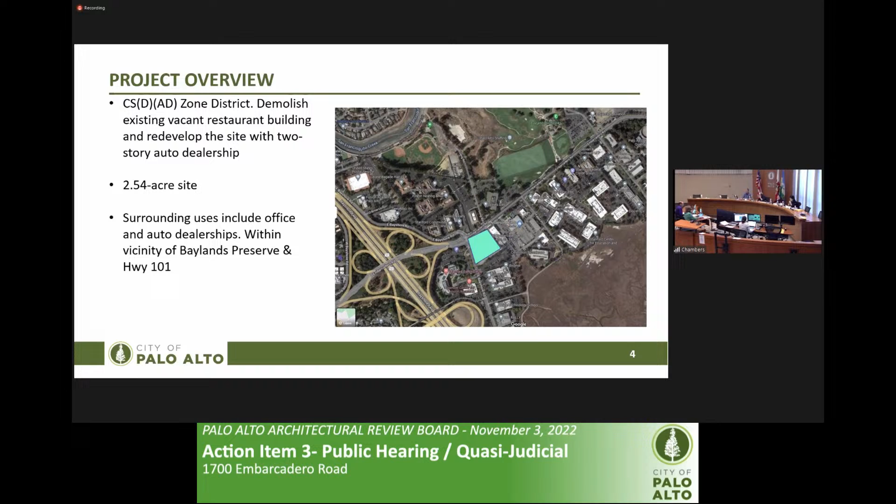This project is completely zoned for an automobile dealership. It does include the CSD, which is site and design - that's why we're going through this process - as well as the architectural, and the automobile dealership combined district, which provides for some unique development standards afforded to dealership applications. The project proposes to demolish the existing vacant restaurant building and redevelop the site with a two-story dealership. The site itself is 2.5 acres. Surrounding uses include offices and automobile dealerships, and it is within the Baylands Preserve area, but within the private development area, and is also near Highway 101.

The requests for the project include the site and design, a variance which is a newer application and request because of parking lot shading, a design enhancement exception for the build-to setbacks, and consideration of a waiver of a loading space on the site. The dealership itself is proposing to be around 31,000 square feet, which equates to 0.29 FAR - well below what is otherwise allowed on the site.

Just to orient you a little bit on that site plan, the drive area between the showroom building and the service building is not counted per the code for floor area. So we're really counting the showroom space, the service space, and the trash enclosure for the floor area ratio.

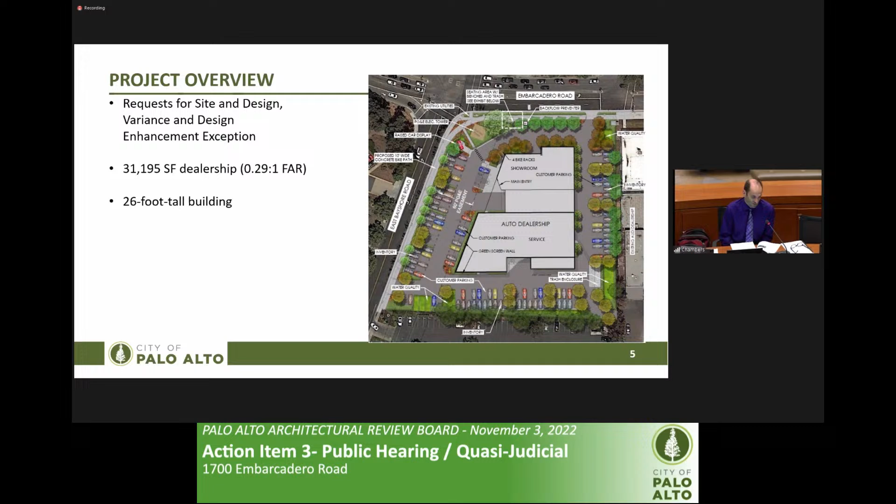The building itself is a little different than the prior iterations on the site, in part because this project includes its inventory on the surface parking lots. The other iterations included the inventory on the interior of the building, through a parking structure or an automatic vehicle storage system, which greatly increased the mass of the project. So this building is vastly smaller than the other iterations we've seen.

Because that inventory is now on the parking lot, there is more parking lot area, making it a little more difficult for them to meet the parking lot shading requirements. We received some good feedback early on in the preliminary ARB, as well as formal hearing comments, regarding the multi-use pathway, and also eliminating a row of parking to allow for that bicycle path.

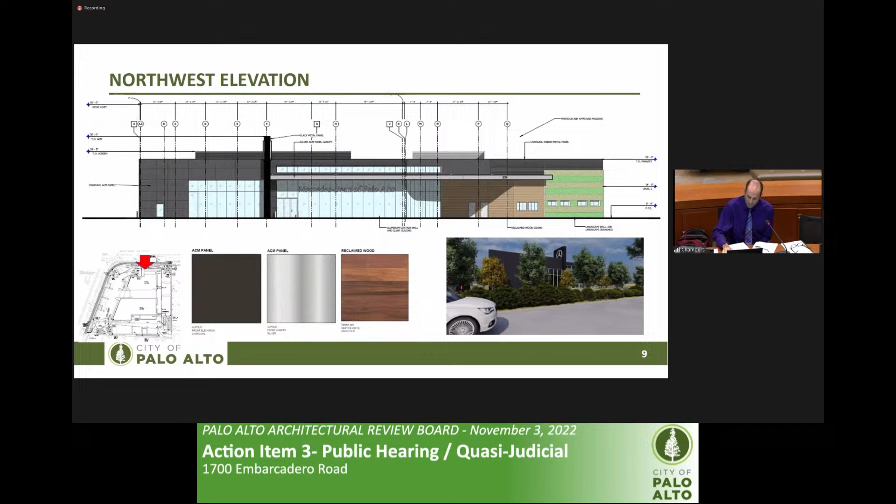But along some of the other elevations, such as the Audi side, they've introduced more green colors in the stucco. Last meeting there was a door there for the service; now that's completely open. You can see the door into the actual service building, and the car wash as well.

Southeast elevation faces the office side. Again, you can see it's more of that green color—the applicant described that when they were out there in the Baylands, that green was the color that was more prevalent, rather than a beige type of color. You can also see the metal paneling was pulled back; in the June meeting you can see at the top where that's been pulled back, showing the difference between the more green hues and the gray hues.

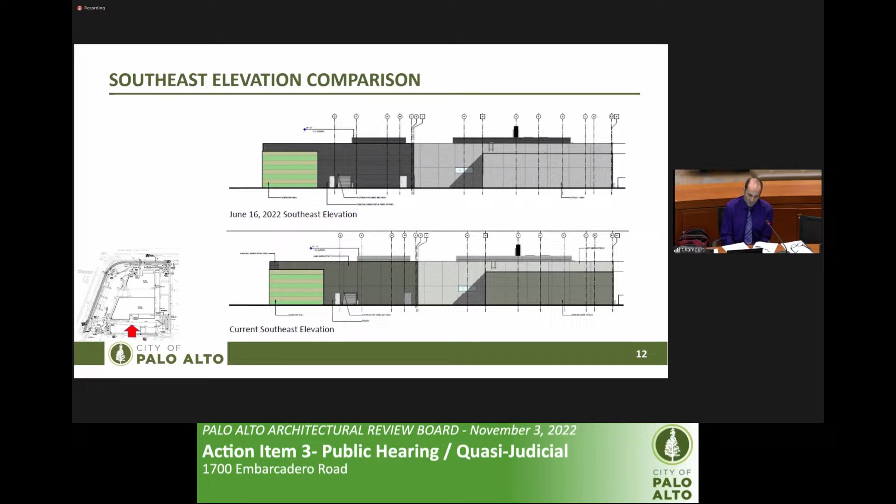Some of the key issues identified on the site are compliance with the Baylands master plan, the bicycle pathway, parking lot shading, build-to setbacks, and required loading spaces. Regarding the Baylands master plan, there's a site assessment and design guidelines that address development in the area, though this is in the private area, so it's a much smaller and slimmer set of guidelines than for developing in the Baylands proper. Nonetheless, one we want to highlight is that the project promotes low and horizontal elements—far and away, this project is low compared to any of the other projects we've seen on this site.

The project uses muted and compatible colors with appropriate materials. As I mentioned, the dealerships do have some more metallic colors to them, and I think ARB in the past has been supportive of that. The lighting would be addressed through conditions of approval to ensure there's no spillover into the Baylands for the wildlife.

So the bicycle path, there's no bicycle lane along that frontage. It just stops at the property line, I think in part because of the extra turn lane, the left turn lane. There's just not space in that roadway to afford that. There are mature trees under those power lines now, those are PG&E power lines.

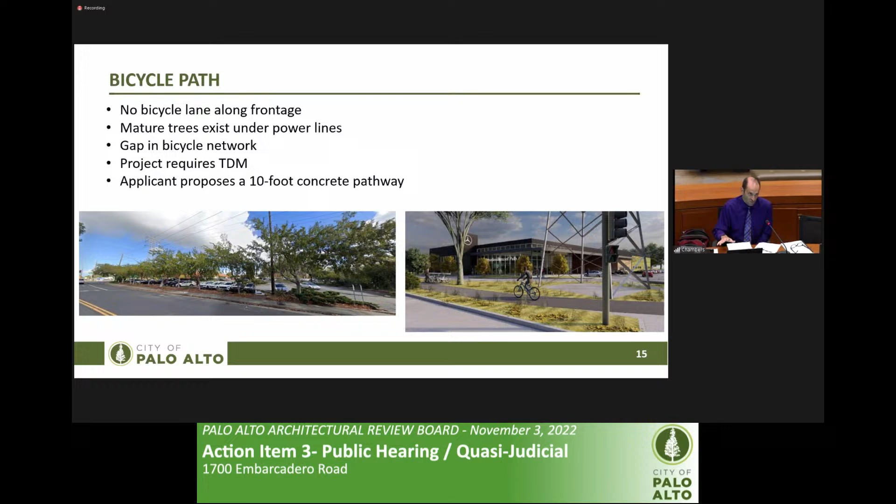The other issue is the parking lot shading. The code requirement is 50%. The project has upped the shading from kind of the upper 30s to the low 40s here, 41%. We do want to highlight there, we provide that imagery on the left.

26% of the property is encumbered by easements—various easements from PG&E, our own utilities, underground and above ground. They have various restrictions on what they can do there regarding planting, height of things, and structures can't be located there. The other issue is the shape of this lot is trapezoidal. It does come to a narrow point towards the intersection, which makes that building very awkward, especially for an automobile dealership trying to get circulation around the site.

The project does also plant trees offsite in the Baylands, and those are natives. So that's a plus that will help us out. But if you were to take out the easement area itself, the remaining parts of the project would meet that 50%.

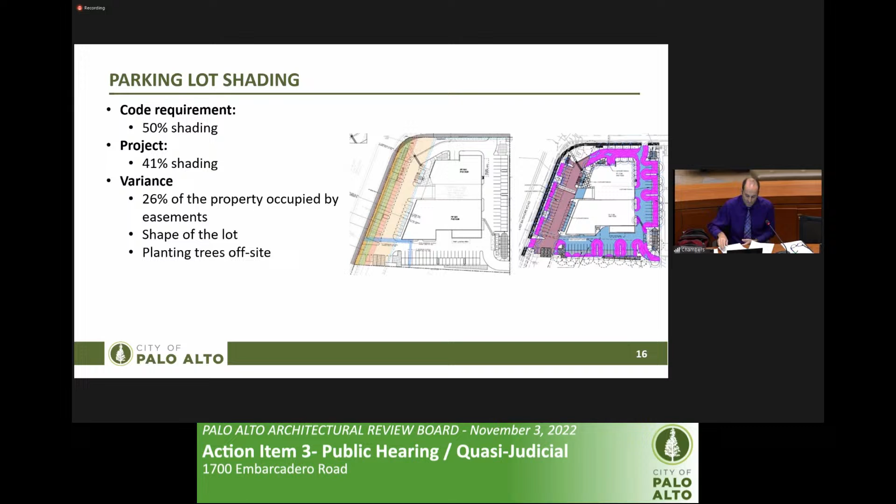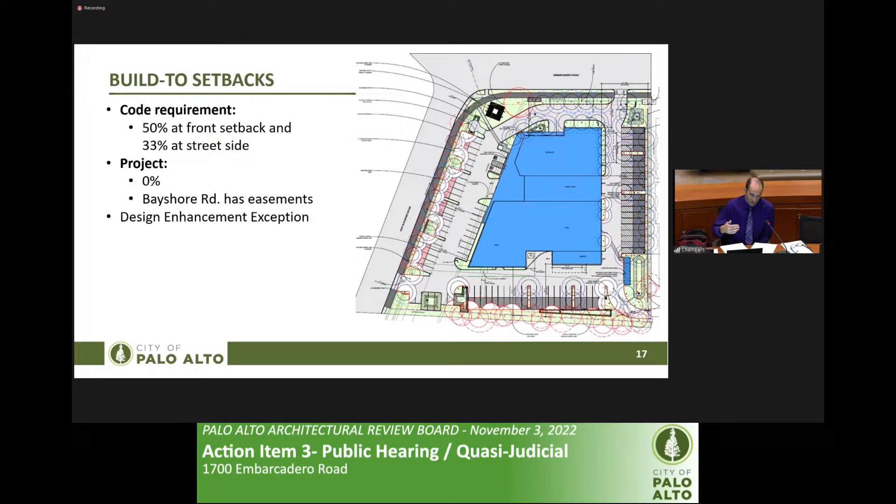The other issue is the build-to setbacks, and we mentioned this many times before. I don't want to spend a whole lot of time on this necessarily because there's just no way the building will be able to be in that easement area. And it doesn't make sense to have the building close along Embarcadero Road because we want to have that circulation around the building.

There are 2 loading spaces required for the project. They've identified spaces for those, and the actual dimensions of those spaces are spot on, they're good. However, the red space there adjacent to the car wash, if that was used, it would not provide sufficient driveway access space to go around. So somebody backing out of that tandem space would have to do a multi-reversing turn to get out of there is what we're expecting.

So we would support a waiver of that space pursuant to the municipal code.

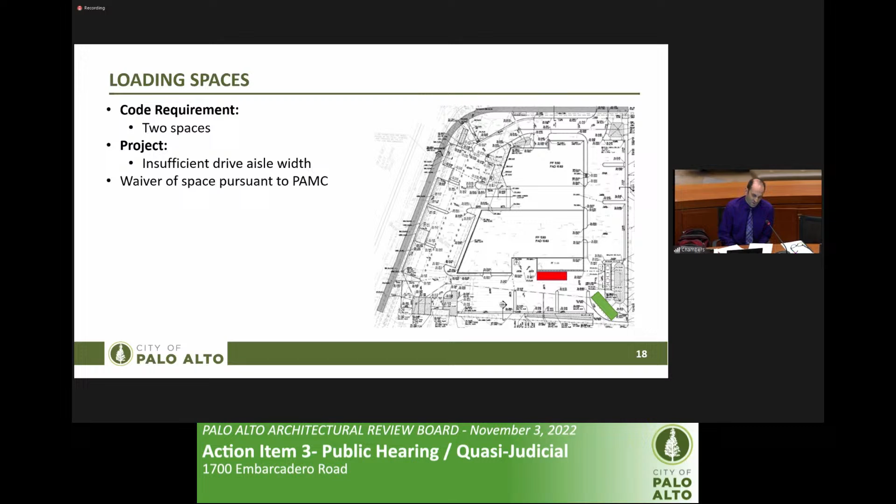The Planning and Transportation Commission had reviewed this project last week and recommended approval 6-0 with the following changes: to eliminate condition of approval number 14, regarding the Audi improvements, tying this project to completion of those improvements; elimination of condition of approval 19 if deemed unnecessary, which had to do with a storm drain replacement that we have deemed not necessary; and for condition of approval 31, provide flexibility to that condition regarding repair of damaged pavement during construction, with the extent determined by the inspector in the field at the time.

Okay, so now we get to a really good slide here. I don't have a whole lot of text necessarily, but we are going to talk a little bit more on this slide.

The California Environmental Quality Act is a requirement. This project does meet the criteria for an addendum to a previously adopted mitigated negative declaration, for the prior project in 2019. We did go through a process to identify issues that have significant impacts, and we have mitigation measures for those. For projects that have some changes to it, like this one, which is a much smaller project, we can do an addendum. As long as we don't identify any new significant impacts or mitigation measures, we don't have to do a supplemental environmental document.

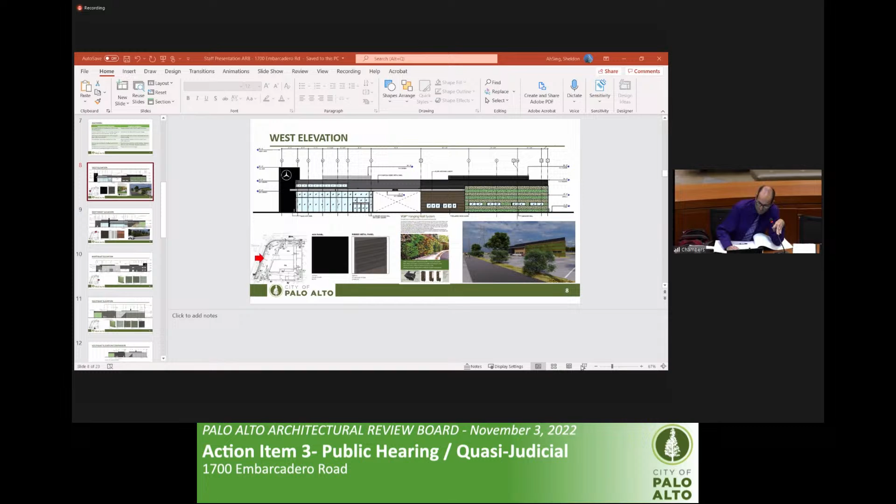So I think I'm showing it on the screen. Is that the correct one, Board Member Chen? Is that the elevation? Right, I could blow this up. Yeah, you see the area above. Oops, did I do something wrong here? I think, yeah.

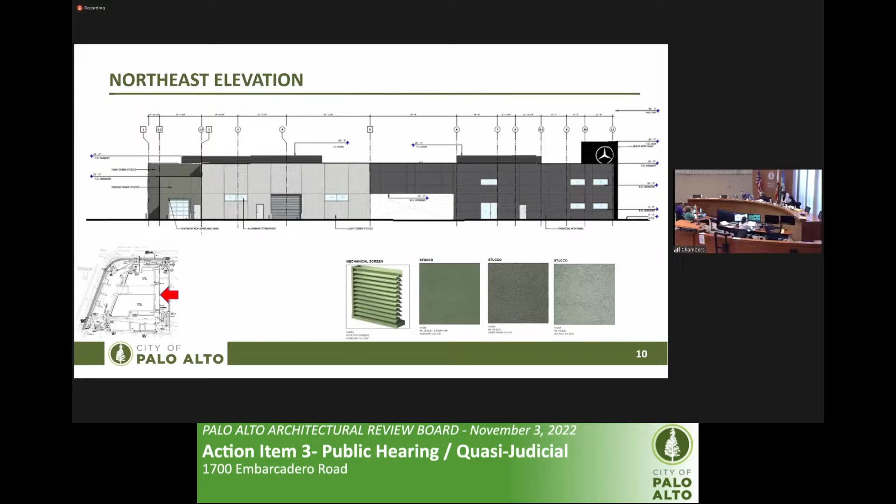Are we talking about the underside of the canopy maybe? No, the wall above it. Yeah, you can see on this elevation above. Can you blow it up?

I think the text says charcoal ribbed metal panel. But the hatch, is it flat or ribbed metal panel? The area above the reclaimed wood siding is the ribbed metal panel. How about the wall on the left of that part? That is a smooth metal panel. Oh, okay.

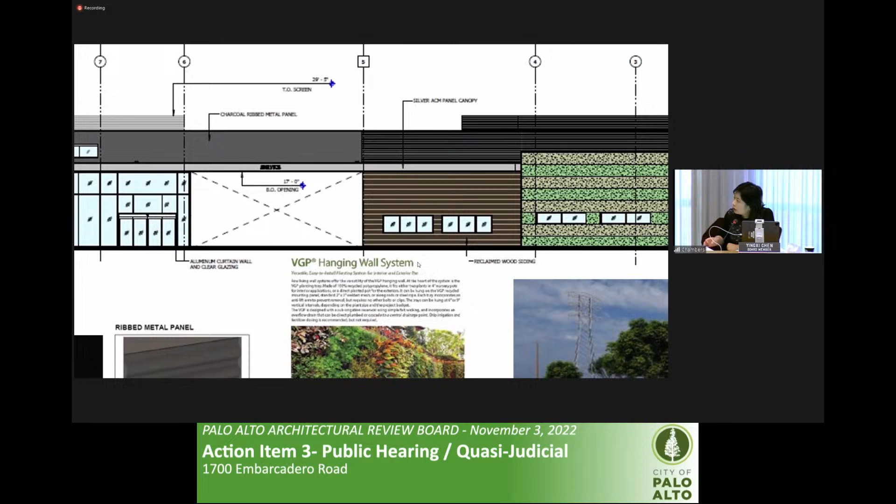That's somewhat traditional in automotive, where the smooth panel is over the showroom area and a ribbed panel is frequently over the service area. Can I chime in? If you go to the rendering on sheet 15, it shows this condition with continuous ribbed panels over the whole thing. It's a little tough to tell, but it's a continuous ribbed panel effect.

Yingxi, do you see what I'm talking about here? Yeah. So to the applicant, you're telling us that the surface above the canopy shown in the rendering on sheet 15 is actually a smooth panel, not a ribbed panel?

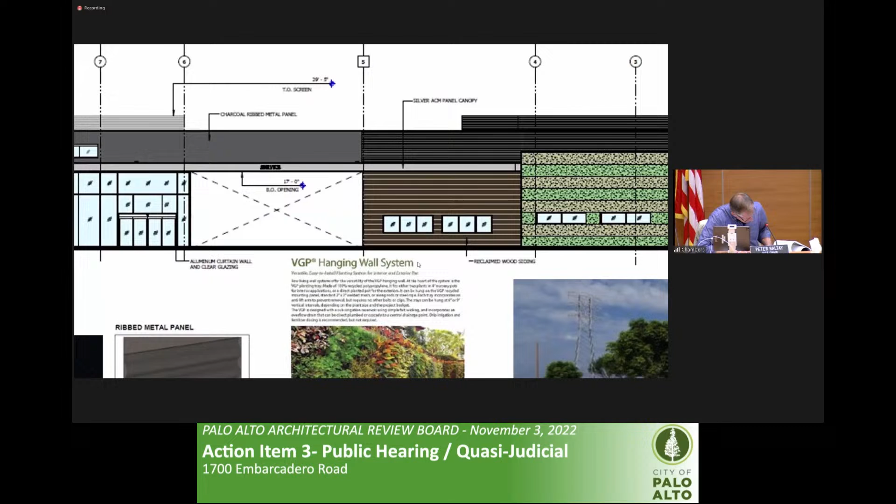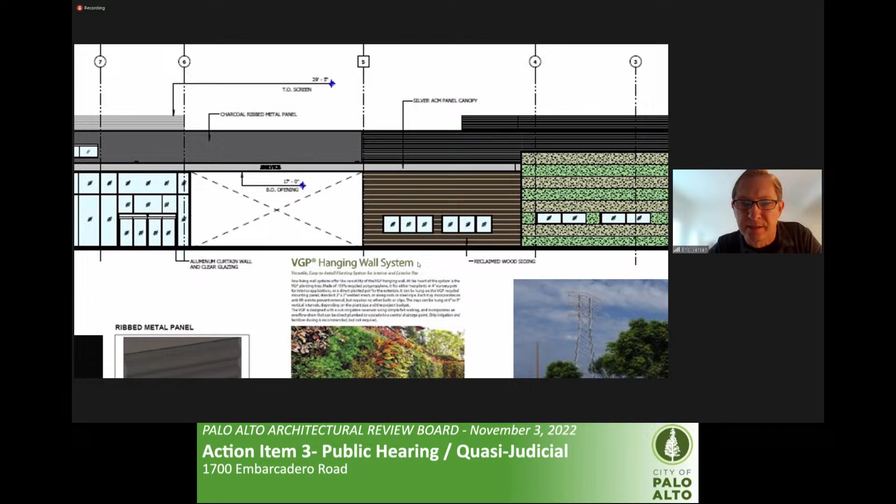Again, it should be a smooth panel over the showroom, yes. But if there is direction today, we can revise that. Even the rendering on page 16 is showing it ribbed as well. Okay, well, thanks for that clarification.

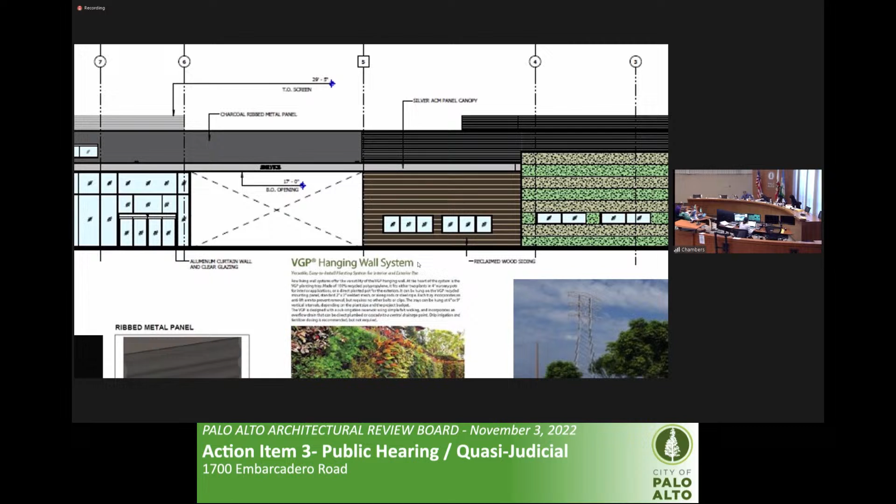There is a white vertical piece going from the floor to the structure. Which drawing are you looking at, Yingxi? Sheet 09. Sheldon, would you be able to bring that one up? Yeah, let me try. Okay, I think this is it. Let me try to blow it up.

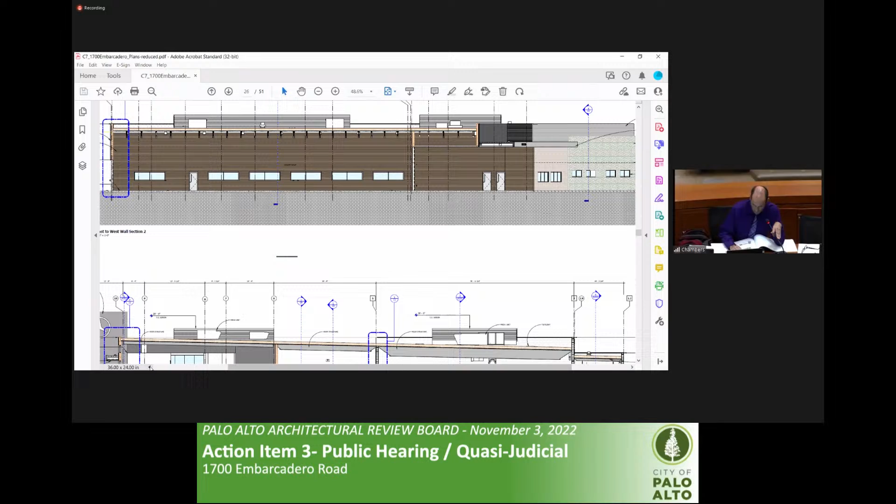Would you like me to go left or right on this screen? I'm not sure what the question was again. Can you see the section on the upper one? There is like a white vertical piece in between the wood panel. Sheldon, could you please move up a little so we can refer to the grid line? It's kind of a break, there's a break in the elevation where... is this it? Yes, this white line. Yeah, this one.

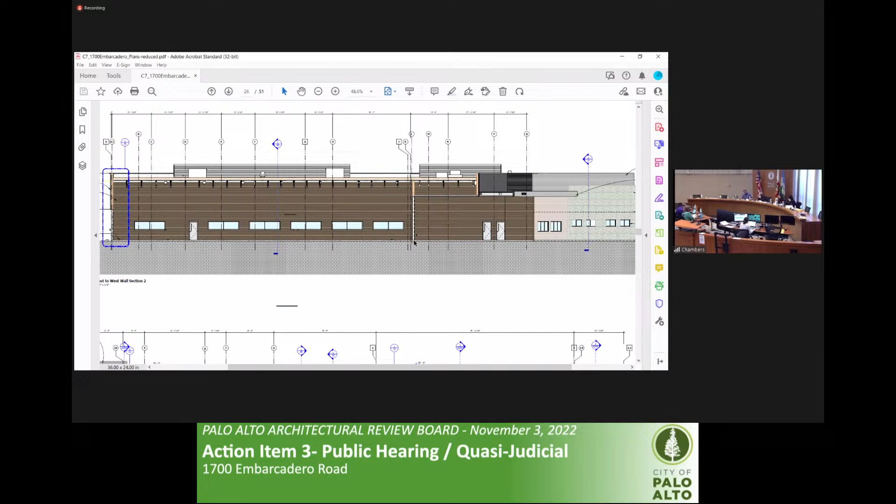You're seeing the wall there because we're in a section. So that white line, the way I'm reading it, is an interior wall. I think there was a time when there was a garage door there. Is that blocking access now? There is not, into the service drive. I mean, that could have been left over from the garage door, but that doesn't seem like it's in the right spot.

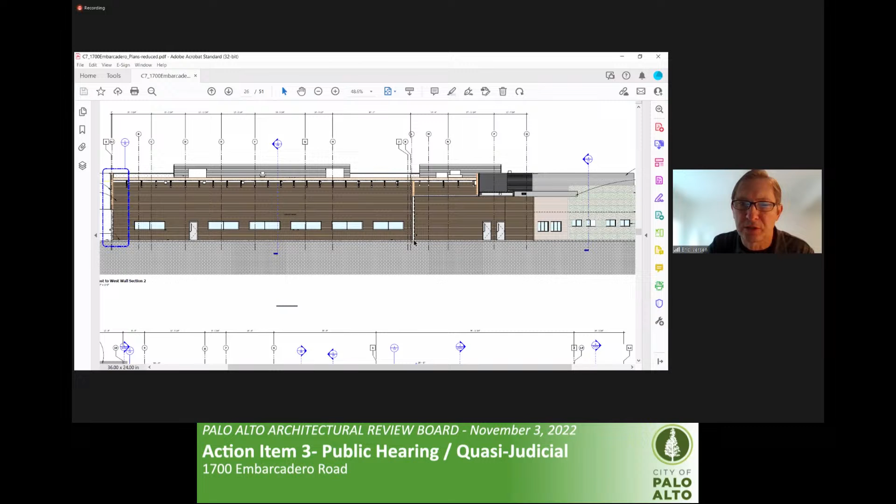So can you confirm that would just be a smooth wood wall the whole way? There shouldn't be anything interrupting that wood wall. Either we're seeing this in a section where they cut on the wrong side of the wall, but no, there will not be anything interrupting the reclaimed wood there. Okay, thank you for your clarification.

Sorry, I just have one last clarification question, I know it's almost 10. So just to clarify, for the bike path to happen, that row of trees is gone and being replaced by different trees. Is that right? Yes, that is correct. Okay, thanks.

Well, okay, we've had a lot of question period here, so if there's no more, let's see if we have some general comments one by one. Who would like to start? Anybody? Sure, okay, I'll keep mine really brief.

Thanks so much for the application. I do think this is the best iteration of what I've seen so far proposed for this site. I agree with the assessment that this is compatible with the design guidelines for the Baylands - it is low, it is horizontal. I like how there's a balance between the identity of the Mercedes-Benz, furthest from the Baylands, and then it feathers into a more neutral, natural palette that is more compatible with the Baylands identity. I really appreciate that the glass is bird safe, so thank you for taking those comments into consideration. In general, I can support this project. I think the items we've discussed regarding acoustical concerns seem like they have mitigatable solutions.